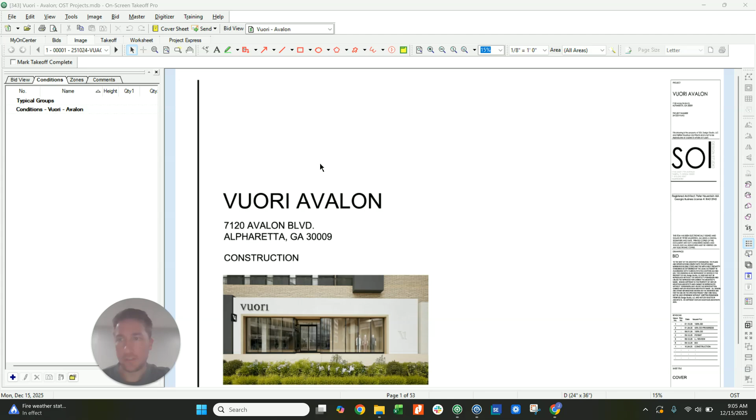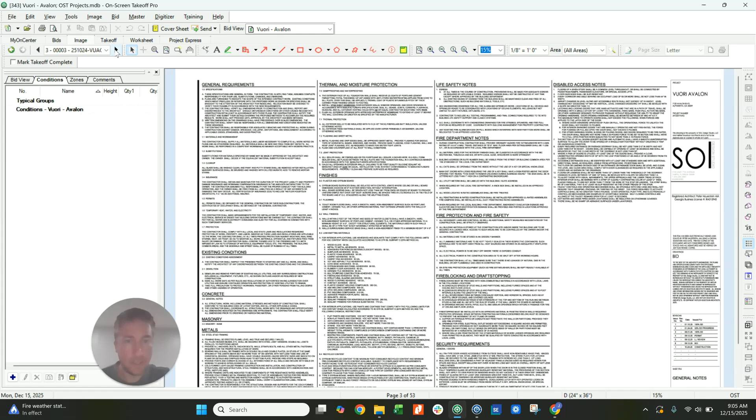So here is a Vuori project we're going to do a takeoff on. It is for a client of mine. We're going to do the drywall, framing, ceilings, painting. So here is a live actual takeoff using On-Screen Takeoff and QuickBid.

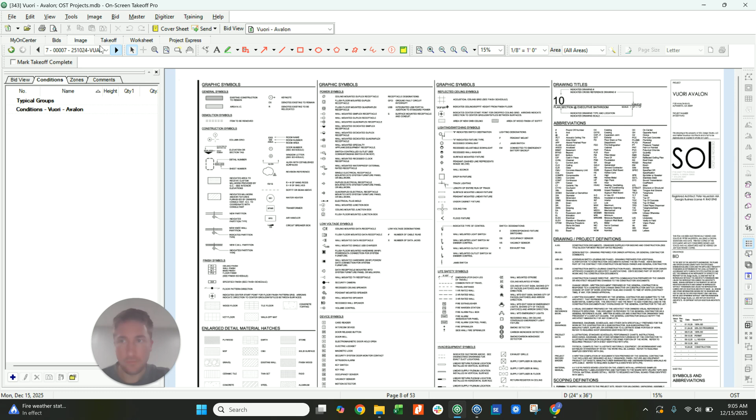So I've already uploaded the plans. I've already converted all my images to TIFF. Makes it more clear for your software to read instead of reading a PDF. And we're going to get to our floor plan. There's our demo plan, and here's our floor plan. We will get started. All right, check our scale. It's 1/4 inch, 1/4 inch.

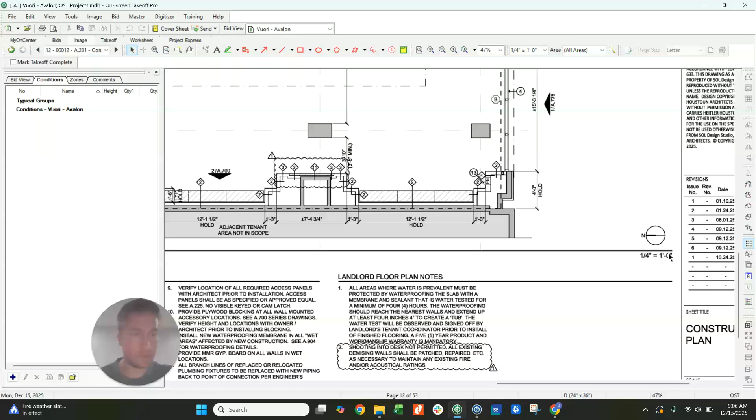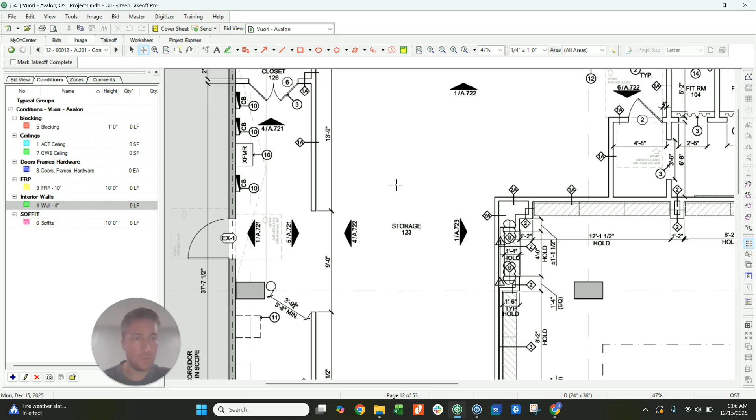And then we're going to pop in this style set that I've created. It's kind of a preloaded assembly thing. I gotta change it up a little bit, but it gets me started. So I don't think there's any exterior walls on this. All right, let's get going here. We got wall 1A, 2A, 7 through 2. Okay, we're gonna do this here. Wall 1A.

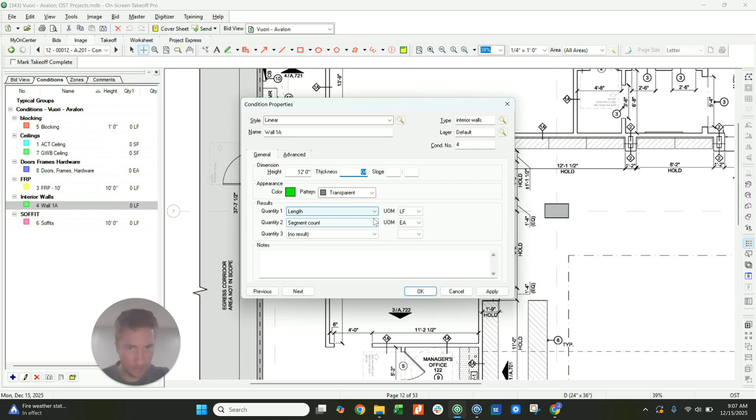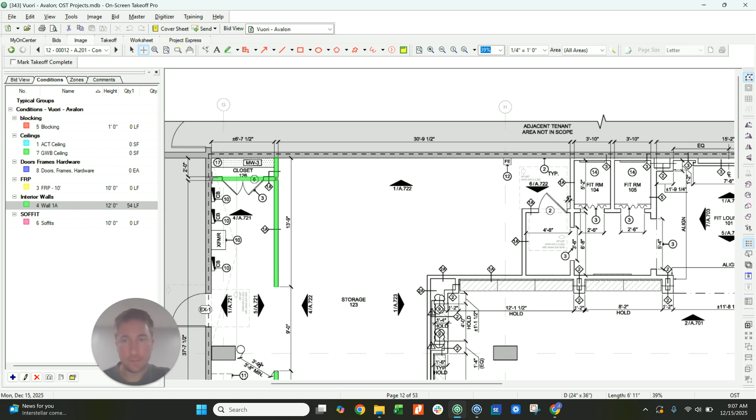Take all my preloaded notes out of there. Just gonna preset it to 12 feet high, might be higher, just to go ahead and put a height in there so I don't forget. And we're gonna start our takeoff with 1A. That's 1A right there. 1A. That's 1A right there.

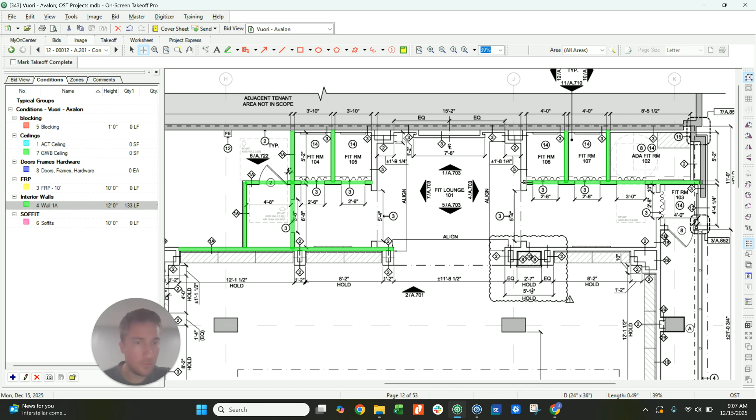1A. And if a wall's not labeled, which this one is, but this one's not, it's usually the standard, whatever the most common wall is on your floor plan. And it usually should tell you a note somewhere about that, but like I said, these are 1A. 1A. Okay. 2B and 1B. Here's 1A. 6, 7, 2. Okay. So I'm on interior walls.

If I was just building a new condition, like from scratch, you hit that plus button. Your type would be the interior walls, or whatever you want to make it. Name, wall 2. Height, 12 feet. Quantity 2, segment count's important. Grabs your stop and start studs at corners. Color, pattern, all that, it's up to you. Thickness, 4 inch, 6 inch. That's again preference. And then you hit OK.

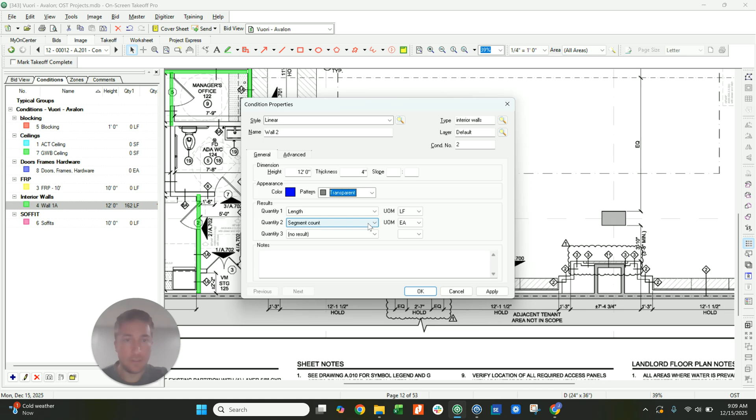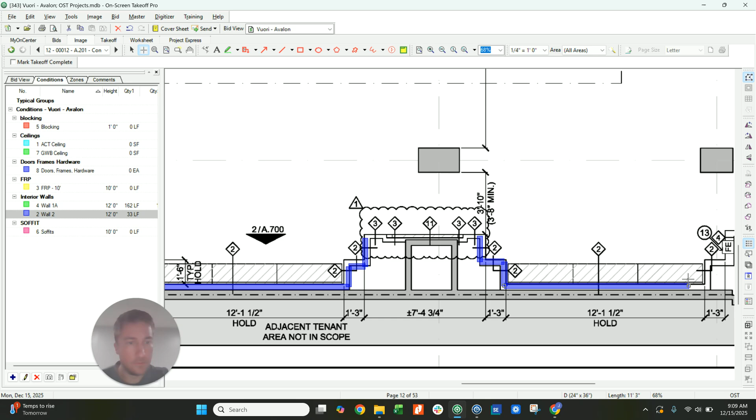That's if you just make it from scratch, but wall 2. And again, you're estimating, not exacting. So that little squiggle there really doesn't matter. Wall 2. Wall 2. Let's find all of our wall 2s. Wall 2.

All right, so I see wall 2, and this one has 2 sides of drywall. It's not just a one-sided wall. So this one I will rename as one side, and then I will duplicate that and just call that wall 2, because that is 2 sides. And I'll just pull it through there. Now if you click that and hit spacebar, it'll restart you. And I don't care, wall 9, there's so little of it, I'll just add it into wall 2. It shouldn't affect me too much. And if you do that and you really get OCD, just hit escape. It'll bring you back to your last point.

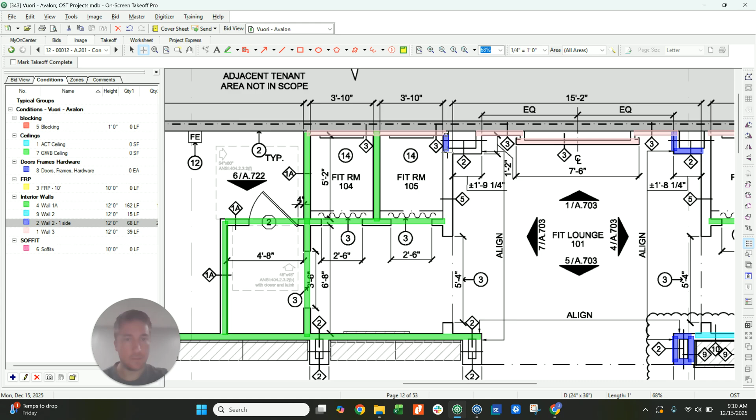Now wall 3, just while I'm here looking at it. And is that wall 3 as well? Wall 3. Wall 2 is over here. See wall 5, how it's thicker, so you can do wall 5, and just to make it clear on your takeoff, just make it 6 inches, and it will fatten up that line, make it prettier for you.

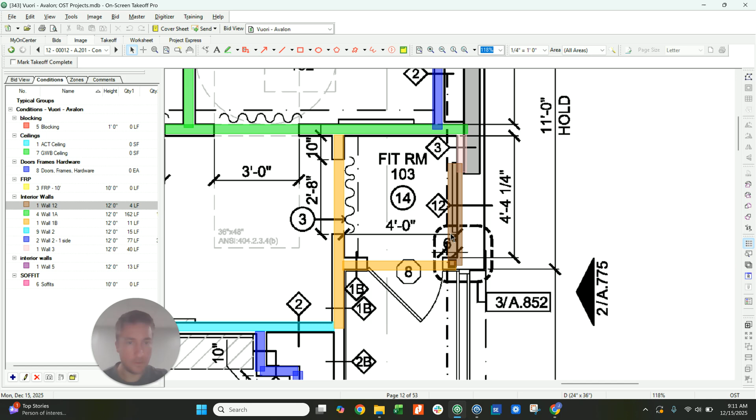Wall 1B. Wall 2B, wall 1B. There's wall 2. And a wall 3 right there, and a big fat 12 right there. That's an interesting one. Where's wall 5? I don't know why it does that. It's really weird. Not a big deal. And I'm going to pull that into here. Wall 2B. Haven't made one yet, so I'll do it now.

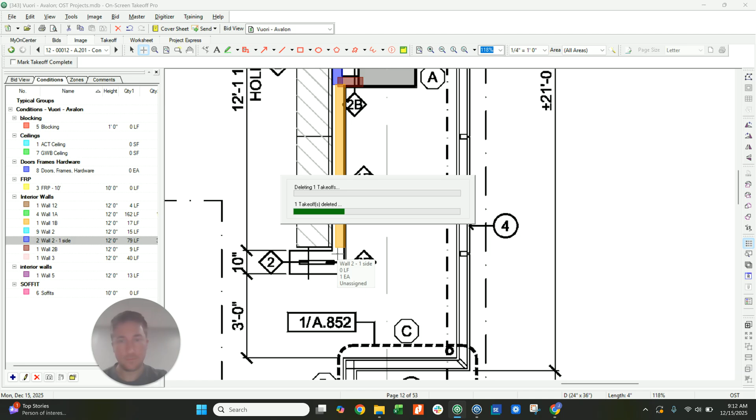Wall 2. 2B. 1B. I hate how they chop it up like that on such a small one. Wall 2 one side. Jumped too fast there. I think I did something up here. Okay, I made that one side. Wall 2. What is that, wall 4? Wall type 4.

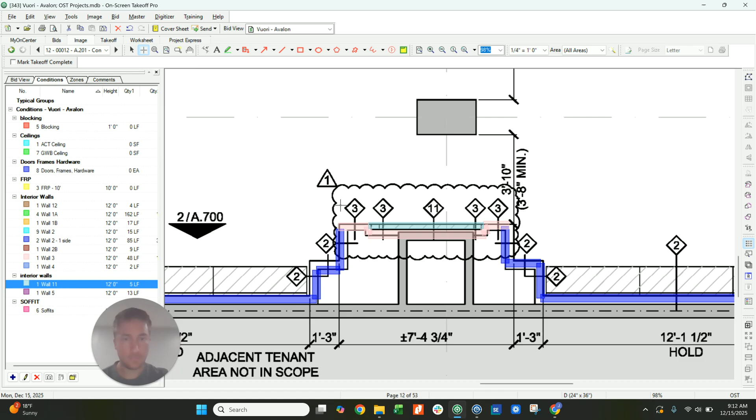Got our 3s up here. That looks like something. I'm going to just grab that. That's wall 11. And I'm just going to make that a little bit thinner. Just make it 3. Two wall 9. I like to just have a note that it's a one-sided wall, just for my own preference, and I'm building it out in QuickBid, and I'll show you why.

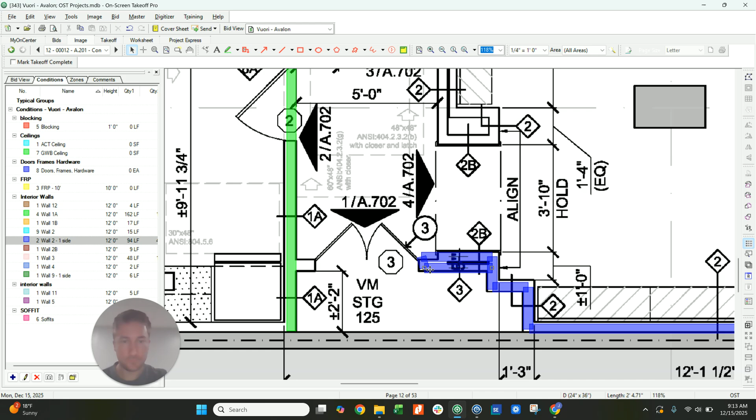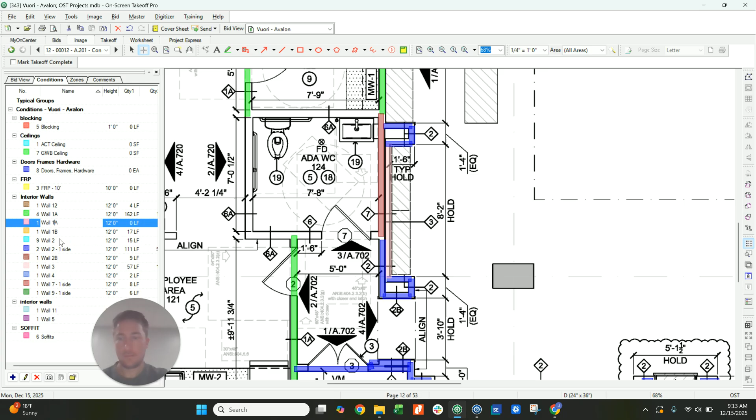Wall 2. I'm just going to do all this as wall 2, because it really doesn't matter. Not really worried about that little bit. 2. 2. 3, 2 one side, 2, 7. 7 seems to be a one-sided wall. Wall 6A. Boom, 6A, 6A. Wall 6.

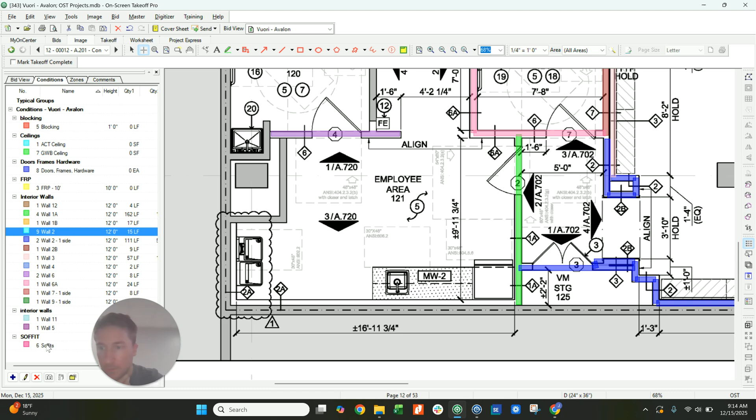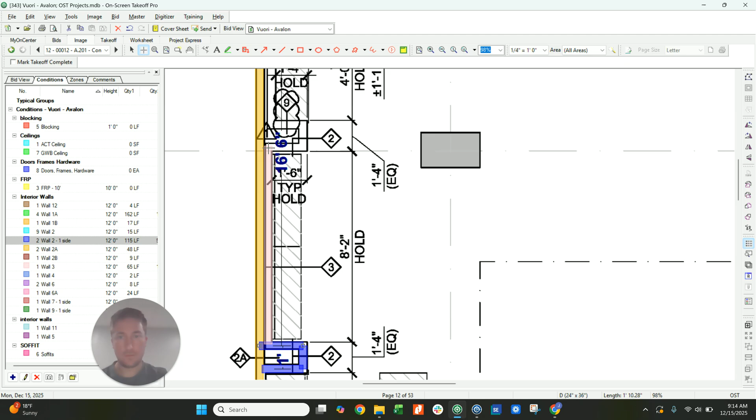Wall 2A. I thought I had a 2A. Okay. 2A. Boom, boom, boom. Grab all this in here. 2A. That over, some OCD, wall 2, wall 3, wall 2, wall 2, wall 2. If it does that, it's auto snap. Just use your buttons to move it over if you want to.

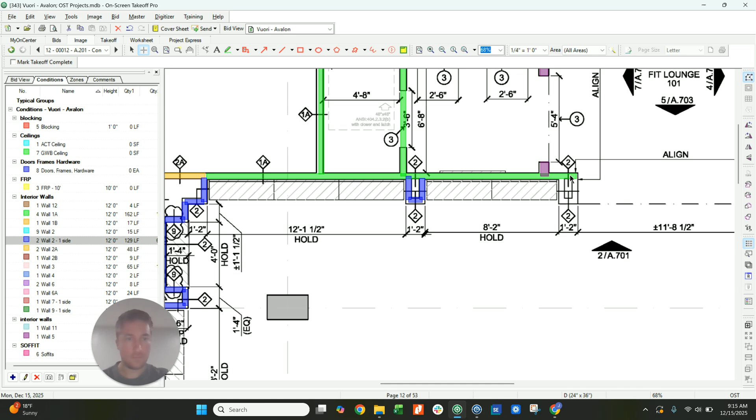I'm just doing this really fast just to show you kind of how it works. I will go back and make sure this is all correct when I actually put it together for the final time, but mostly this is accurate.

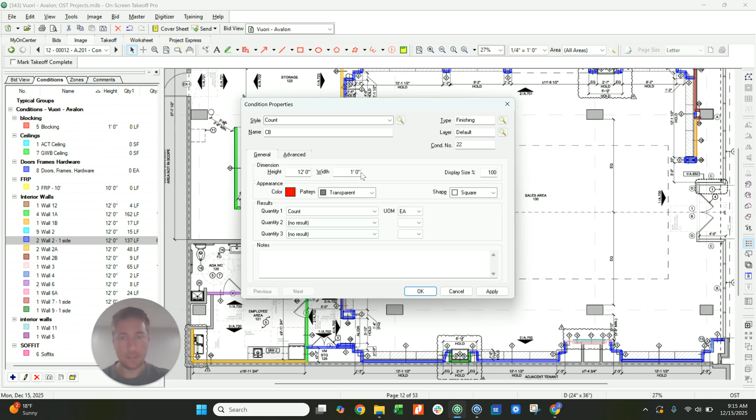Finishing. We need the corner beads, height 12. We're going to make those a count. And I was taught, make them red circles, and where all your corners are. Doesn't have to be pretty because you're just estimating. When you get awarded the job, you can go back and make everything nice and pretty for your boss or yourself or whatever, your client.

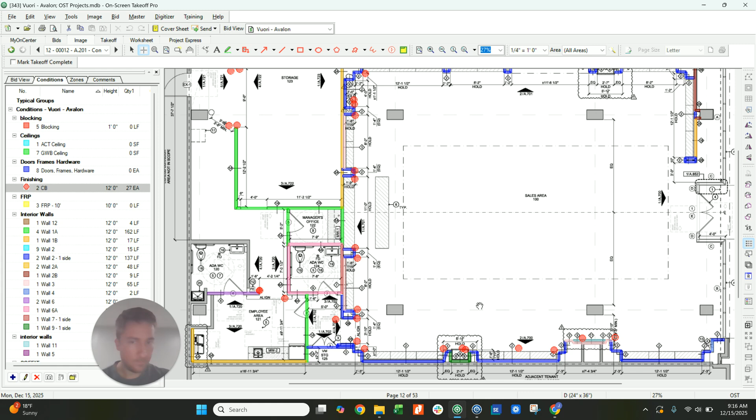If you do that, just move it down. Boom, boom, boom, boom. Wow, my computer's going really slow. Boom, boom, boom, boom. Okay. That should be good enough for this right now.

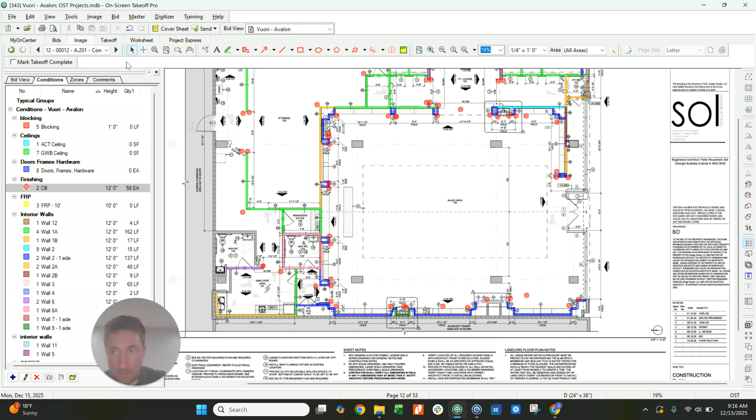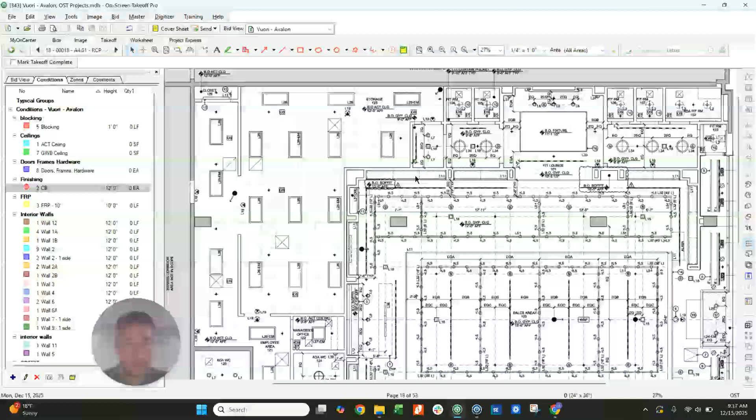Let's go to my door schedule. Power plan, why is that on here? Here's my reflected ceiling plan, 1/4 inch scale. Okay, let's see what this is. It just says acoustical ceiling tile ceiling. So we're just gonna run with this. And then look at our finish schedule. ACT ceiling tile, so it doesn't really tell me any differences.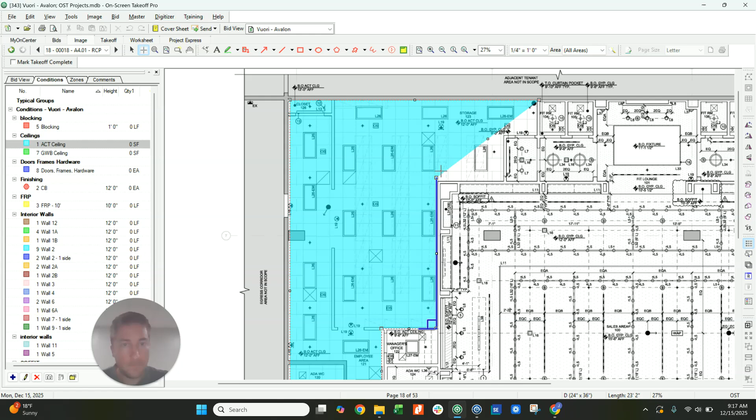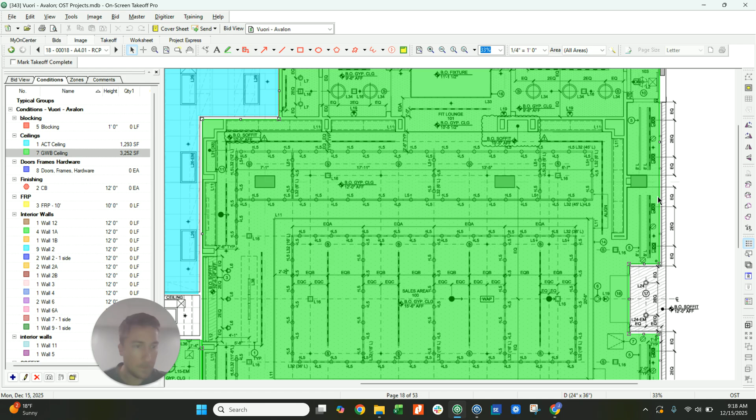Pick up all that ceiling tile, and then we got our drywall ceiling, just so you can see it, and it's got that pattern, so you kind of know. We're just going to pull all of this. Yeah, this looks like it's all drywall ceiling, which is very typical in these retail spots. Pull through that. Soffits, we'll grab those here in a second. Pull that out a little bit. Is that acoustical ceiling? Yeah. Grab that too. Boom.

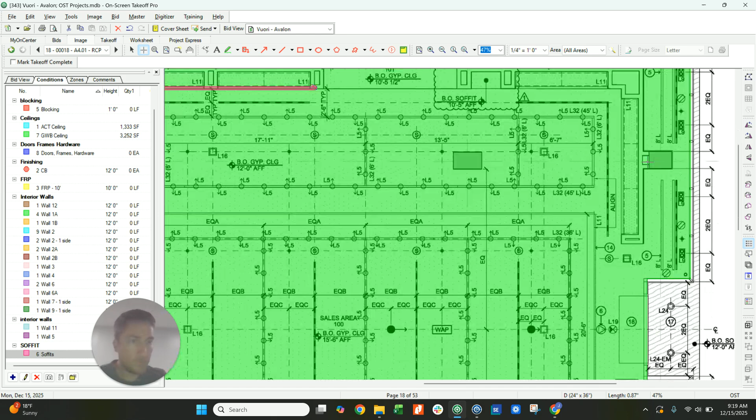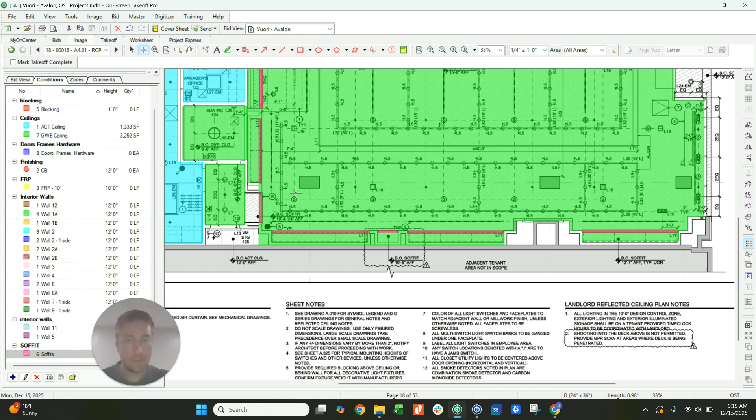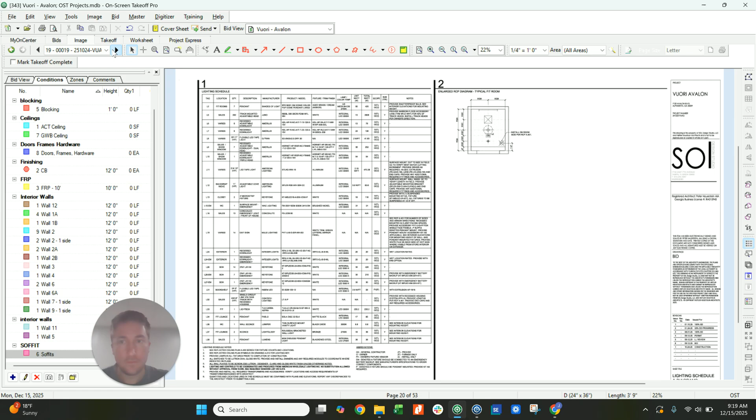And grab our soffits, which most of the time that's a soffit. And that says bottom of soffit, so these are drop downs above shelves and all that stuff. Bottom of soffit, pull that through. Okay, let's see here. Bottom of fixture, some kind of fixture hanging up there. That's a soffit, that's a soffit, that's a soffit. Soffit, soffit. There we go. Soffit, bottom of soffit. Okay. That's the gist of soffits. I will go back and make sure all that's correct. I'm just doing a quick takeoff, as I said.

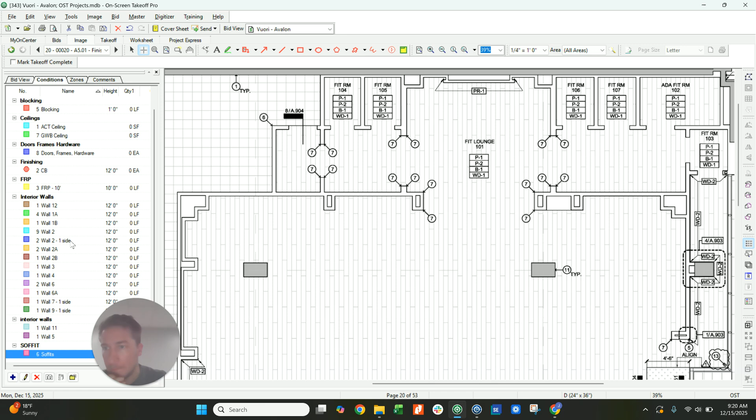So here's P1, that means paint walls. These are accents, wood, something, bits and pieces here and there. That's an accent, probably some wall covering or something. But paint, do I have paint here? I'll do this, paint walls. Quantity 2 on painting, do surface area. Whether you do one-sided wall or two sides, I do one to keep it clean and easy. Sometimes it gets a little tricky if you do two sides and you accidentally pull through a single side, so I just keep it single side.

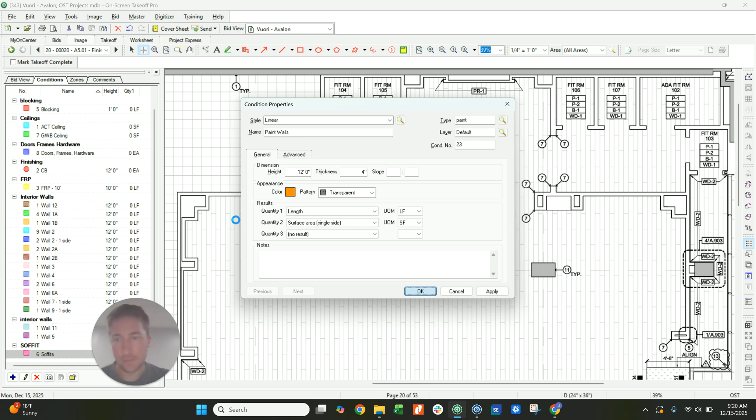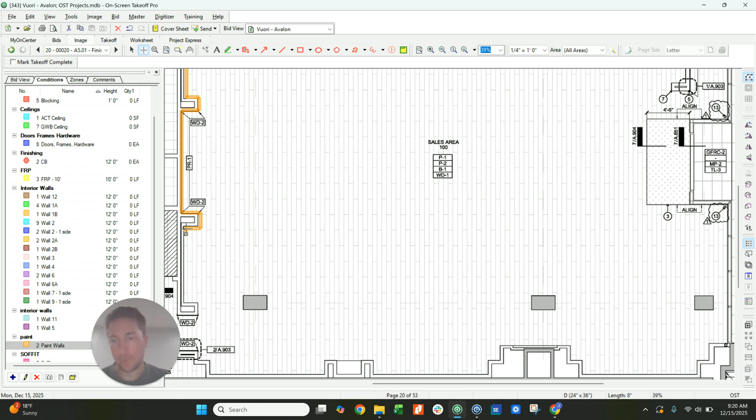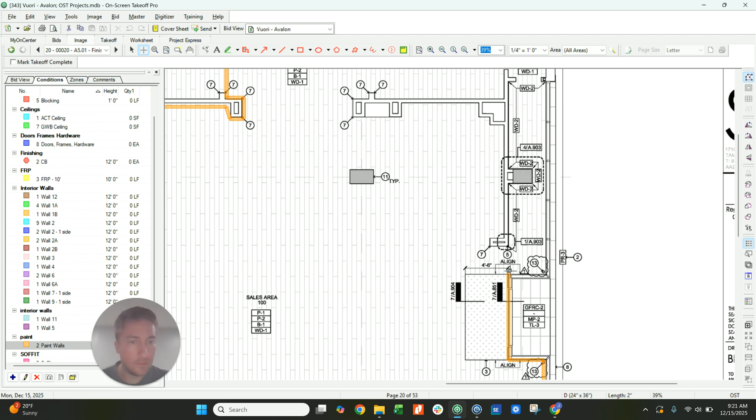So it looks like this whole area is being painted. So I'm just going to start here and grab all my paint. Even if it has an accent, it'll probably still get primed, so I'm going to paint it. And it's not that much, so I'm not too worried about it. I'll pull through there. I'm getting a little lazy. Now let's pull through there too. I paint all that upper soffit area. What is happening back here? Paint, paint, paint. Okay. Alright, you get the gist of how to paint that.

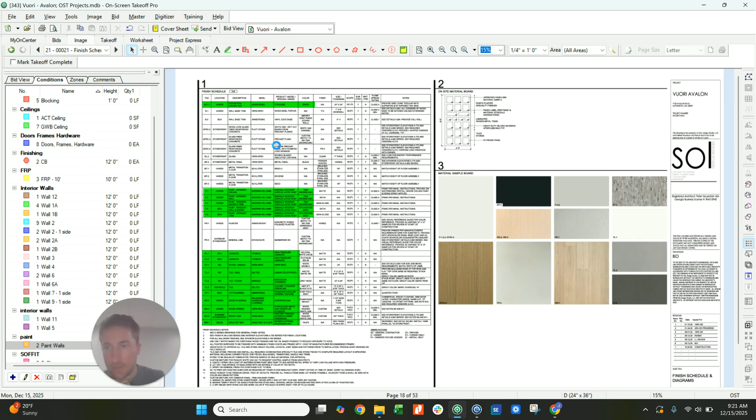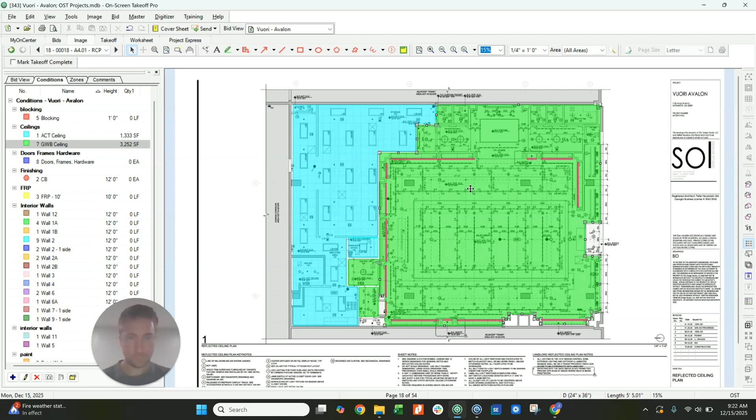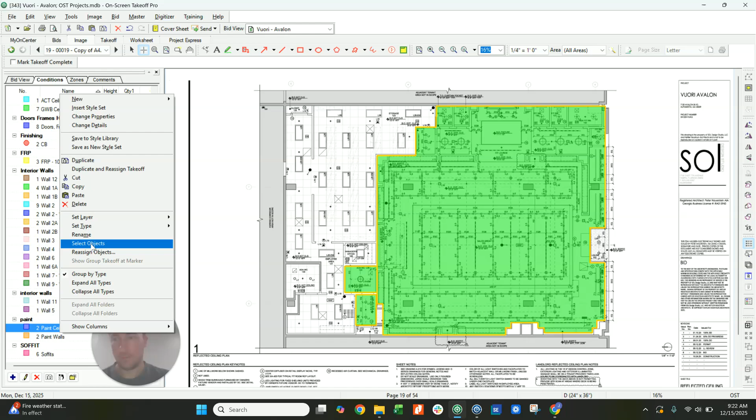And when you're doing painting on your ceilings, I usually take this and go to my cover sheet. I find what page this is, 18. I will duplicate it and go to page 19 where it now is. Actually, go back. I will select my drywall ceiling, copy, go to the next page, paste. Then I will go under my painting. Actually, I'll make a new one. Paint ceiling. Make it an area. Simple as that. It's not working with me. Okay. Drywall ceiling, select it, reassign. And that is now being painted. That's a quick, easy way to do that kind of stuff.

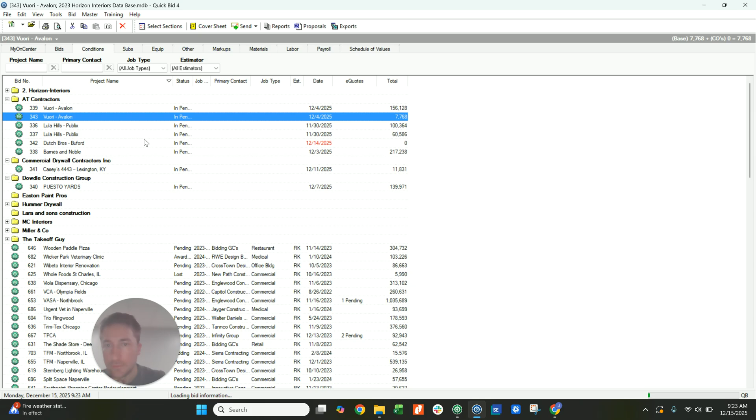Now, where's my wall types? I'll go into Quickbid here real quick and start assembling these. Let's see, I think it's this one. Alright, I will start at the top. Acoustical ceiling. Assemble. I have all these pre-made. If you get Quickbid, they will come with a few of these already pre-made for you, but over the years I have made a bunch of my own. So I will go to acoustical ceiling. I'll pick something pretty standard, Prelude, 2x2 square edge tile, pop it in there.

And then it builds it for you. I used to build these single at a time just by knowing what it was. It really helps you understand the assembly itself. But if you want to jump to it, pre-assembled, easy enough. Gets all your stuff in here. This bottom one's your tile, this one's your grid, this is all the stuff in between.

That's the grid labor, actually, I'm sorry. The grid is all up here. So if you go to labor on here, that's your angle. I don't really mess with that. I'll leave it as it is. That's your hanger wire. These two are the ones I usually mess with the most. That's your grid and tile.

Grid, it's up to you. 55 cents a square foot. Tile, I don't know, 35 cents. I'll have to ask my clients what they usually plug in for that. Those are the basic ones you usually want to mess with. And then your material, I got to get updated material pricing on everything.

Let's go to a wall really quick. I don't want to start with 11, I want to start with 1. Here's my wall type 1. Let's see what we got here. 362 S 162 33. That's 3 5/8, 33 mil stud. 33 mil is common on all these little retail inside of malls, especially. They like to have a little bit stronger studs, and it goes, looks like 6 inches above the ceiling.

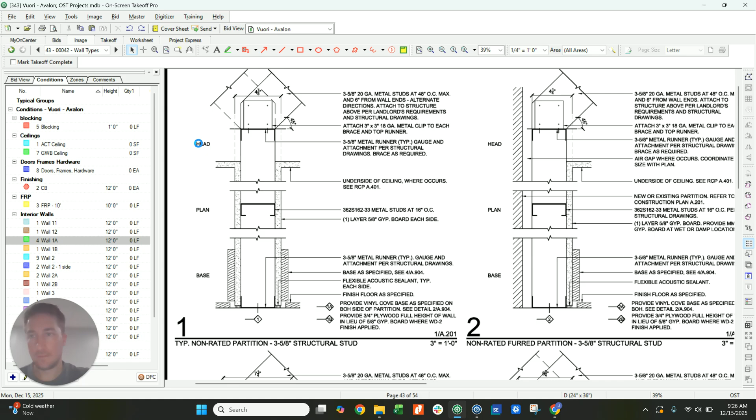3 5/8, a layer of drywall each side. You got this little acoustical sealant, two runs of that. Metal runner, a clip, braced. Okay, got the gist of that one. I really want to know my ceiling height though, so I'll go to my RCP.

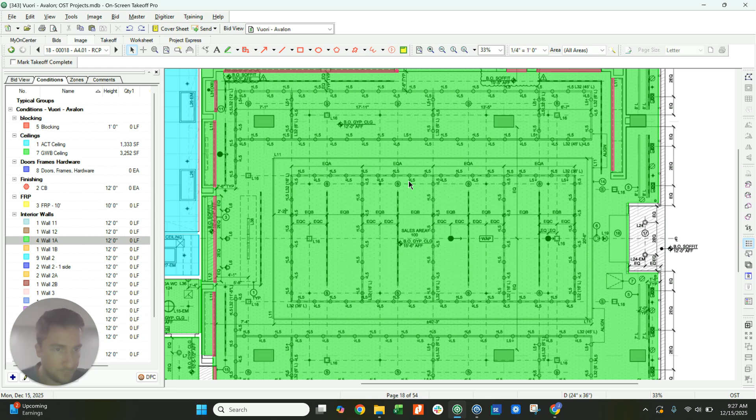10, 9, 9, 6. We'll call it 10, 10. What's back here? 9, 6. Looks like an average of 10. There's 12. I'll just say 12 to be safe, because I saw this one's at 15 in the middle here, which I don't understand. If there's some kind of soffit here, it doesn't really tell you, so we'll just average it at 12 on the ceiling height, which I got 12 plugged in.

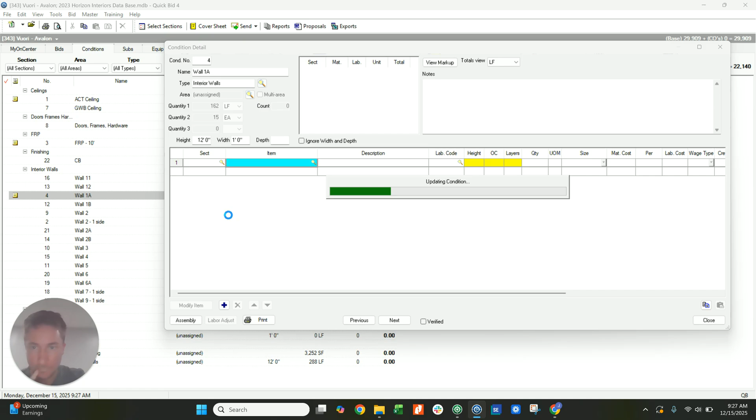So pre-assembled walls, we will do 3 5/8 braced, 33 mil. So you got your layout, you got your top track, you got your bottom track, you got your stud, you got your stud start where your segment count grabs, you got your kickers, you got your pins and loads, I do frame, square foot, heavy gauge, since it's a 33 mil.

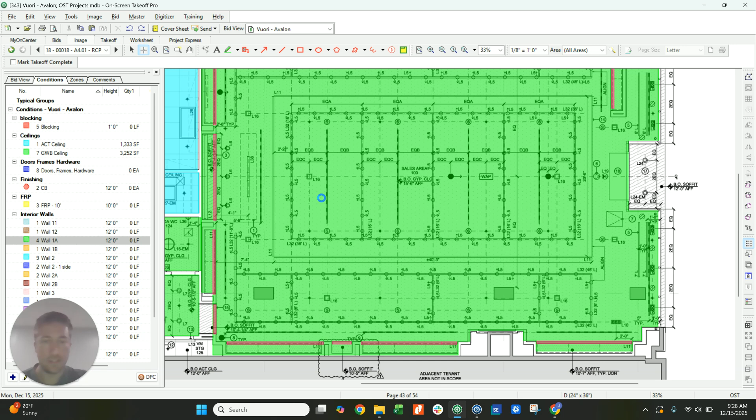Got your drywall, 2 layers, drywall. We'll put your Tek screws in there. And your tape and float. Again, you can do your labor here for all your stuff. So that's basically how you build your ceilings, your walls in Quick Bid, and it's the same thing over and over with your different wall types. Just how you see them is how you build them in Quick Bid. See, that's a one-side drywall, braced, no drywall on this side because it's a one-sided wall.

Then you go to your equipment, you put in your scissor lifts, however many you want, markups, your tax burden, whatever your state tax is, and then your overhead and profit, 20%. That's very competitive. I would even go 15 and 10, and then equipment, just do 20% on top of equipment. It's no big deal. Labor burden, 20, 30%, whatever you want to put on.

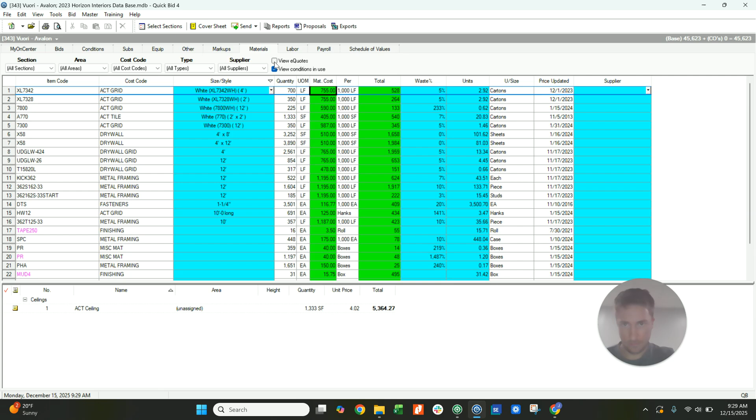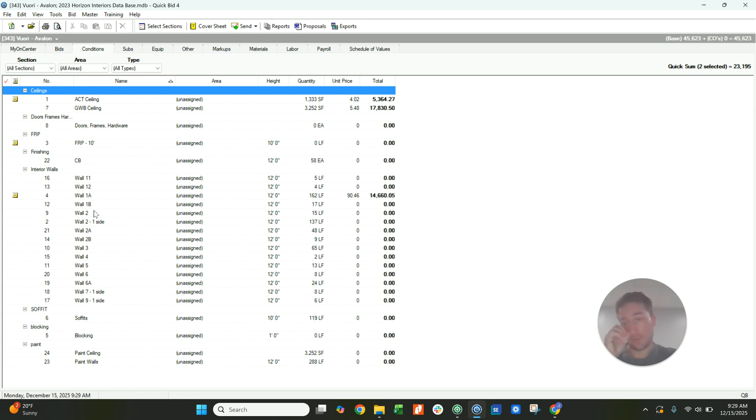And then here's your main material list. It's a lot quicker of a way to go through and plug in your material prices. Same with your labor. This will change it for every assembly altogether. So if you have a wall that's a lot more tricky and you want the labor to be higher on just that wall, go through each one of these and do your labor in this, each one, not your master.

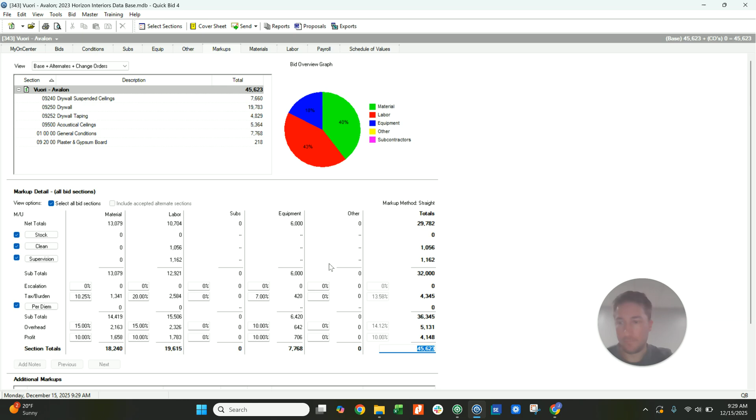So that's the gist of that, and then you get your whole grand total down there. Tells you your overhead and markup right here, your price for the job. It's pretty cool stuff what On-Screen Takeoff and Quick Bid will do for you. So that's the gist of that. Let's see here.